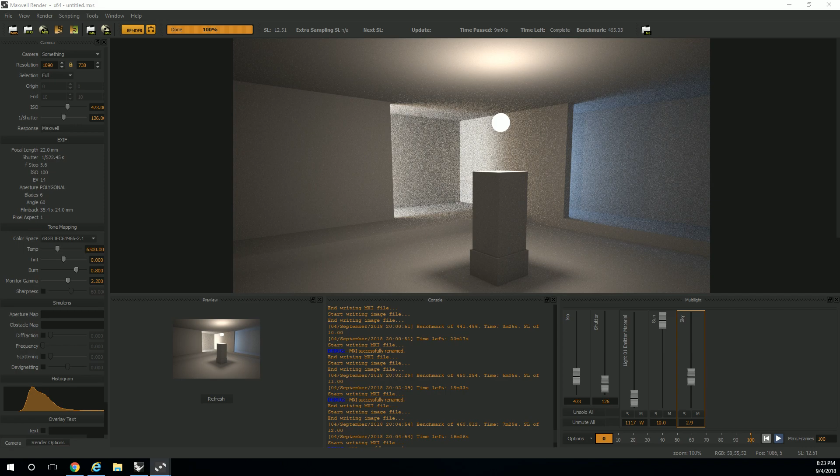It had blue light coming in from the north, and it had what is showing as white light, but it's actually more of a warm yellow light coming in from the west. But what I did was, in order to combat that graininess and to get my rendering to run faster, I simulated that light by putting point lights outside of my model. So I put a warm point light here, and a cool point light there, and ran it that way. So this is the result.

It's not perfect, not exactly like the other one, but it serves the purpose of simulating it. What I would do differently is pull this one back a little bit so it didn't spray too far into the space this way. But anyway, we'll talk a bit about that kind of stuff once you guys start getting into it. So we went from this to this.

Not too terribly different. I'd probably change the quality of the blue light too and make it a little brighter. But this one, far less grainy, only ran for 5 minutes. When you start doing 4, 5, 6 hour renders, that's a major difference between the two—the difference between a 3-hour render and a 5.5 to 6-hour render.

Okay, but anyway, so that was just a quick little trial.

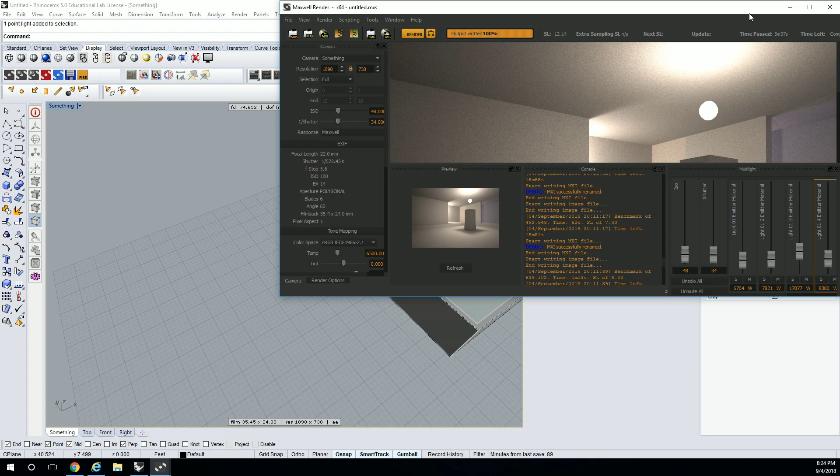So let's get into some more interior lighting. What you guys will probably need to be aware of is that we're starting to get some real-ish lighting quality in the space, but it doesn't feel real. It doesn't feel real because we have this little ball that's just hovering there.

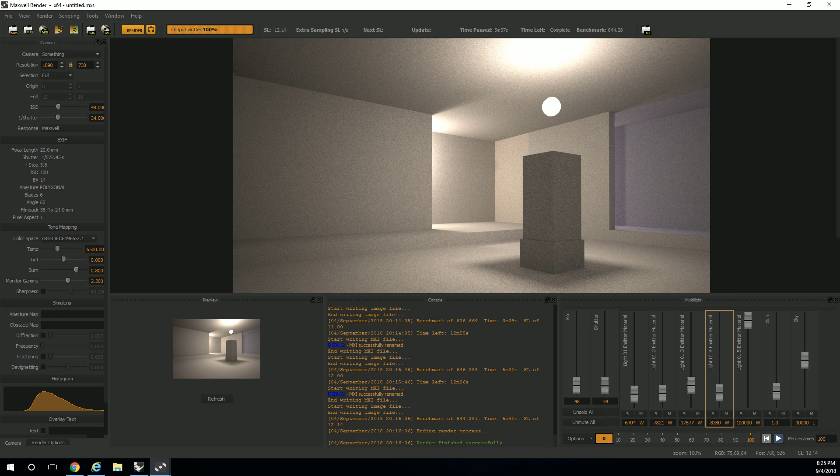So what we actually have to do is model enough detail to make what we're doing in the space feel like it pulls us into the realm of reality, and just make it feel like we're in that digital world and actually in that space in our real lives. One of the easiest things you can do is just use the smallest amount of detail possible. If you start using fine detail, you don't even have to do it too much—it's actually going to read really well.

So let's get into the model. What we're going to create are can lights. Raise your hand if you know what a can light is. Okay, so a can light is like a recessed light that you see anywhere.

Looks like these—they come in many different shapes and sizes and varieties. Some swivel, some stick out, some are further recessed. The key here is you're going to be tempted to just cut a hole in the roof and put a little disc in there and say, this is a light, go. But we need to change it so that it actually shows that little rim. And I'm telling you, that little rim on that light makes all the difference.

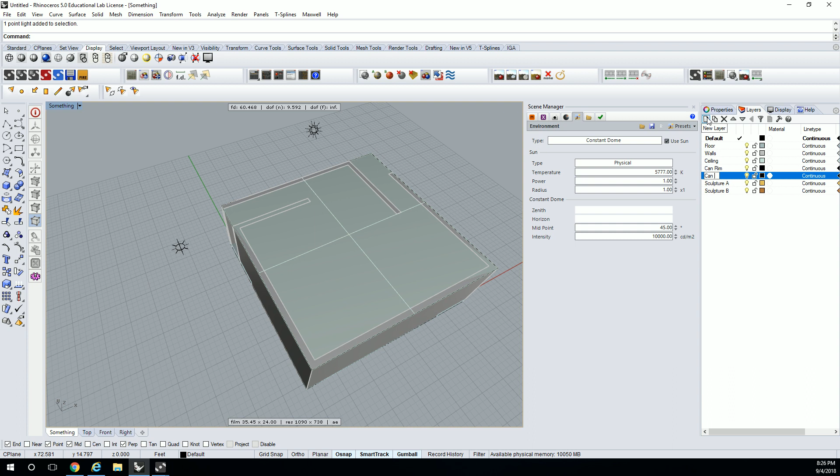So we're going to do a little trial. In your model, let's turn on a layer and call it can rim, and then we'll do can light. The can rim, I'm going to make blue. Can light, I'm going to make light gray. So the way I'm actually going to do this is just using a sphere.

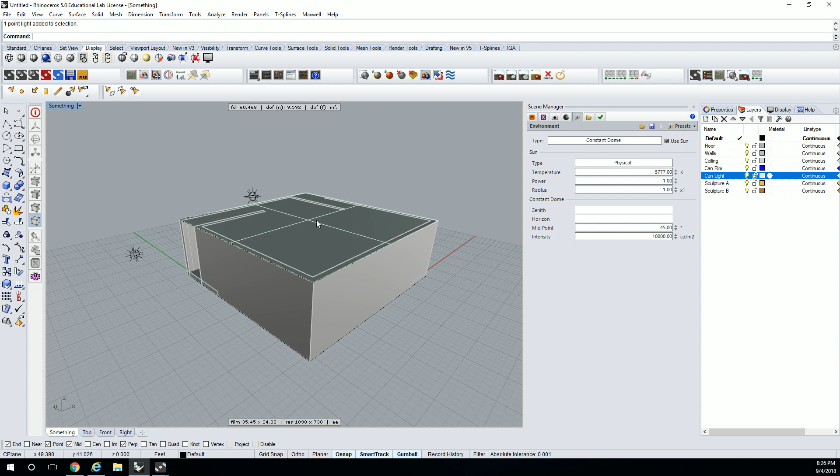So I'm going to model a little rim around it. We're going to go to can rim, let's do a sphere, start off here. This is a radius dimension, so most cans are going to be anywhere from 4 to 6 to 8 inches. I'm going to accentuate how big these are just so they're a little more obvious. So we're going to go with 8 inches, which is a 4-inch radius.

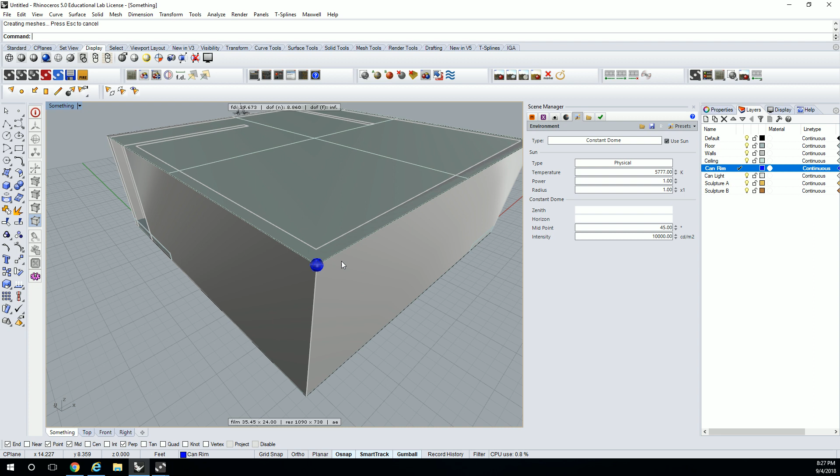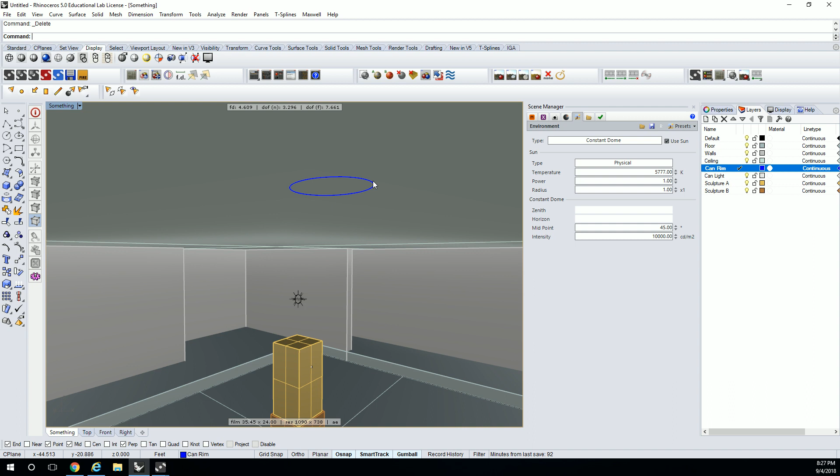Okay, when I move this thing into the space, I can use the roof to split it. So I'm going to say select objects to split, use that to split it, and get rid of this. There, okay, so that's my semicircle.

The cool thing about the semicircle is I can actually extract the wireframe just to get that edge. Side note, guys, if I ever say a tool you've never heard of and really want me to explain it, you can stop me. If you've never heard of extract wireframe, it's a really important tool you should know about.

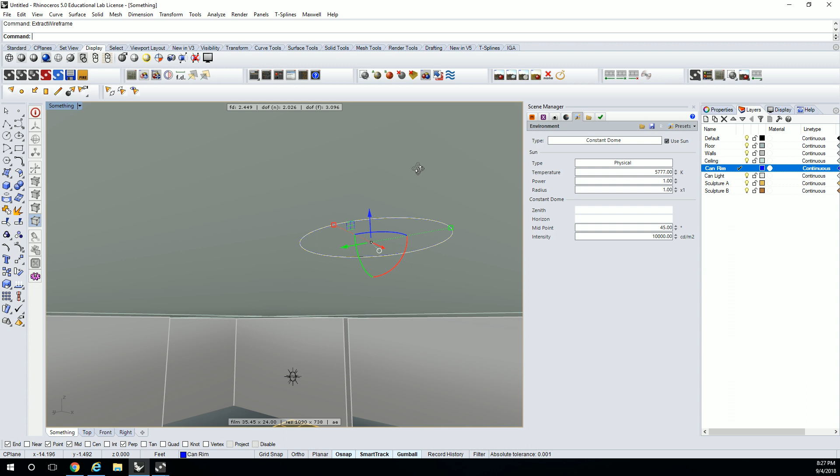Okay, so I'm going to extract that and do a couple things. I want this to be efficient for me to model, so I need to first create all the geometry and group it up together the way I need it to be and look. Secondarily, I'm going to have to create a disk that I can move around with all the model elements I place, and that's going to be used to subtract.

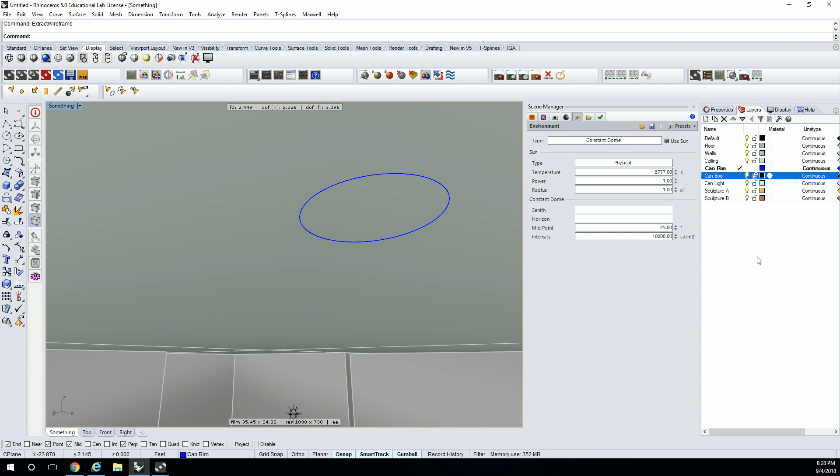So I'm also going to create another layer, and I'm going to call it can bool. That's for my, I don't know why I call it bool, I call it negative, subtraction, whatever you want to call it. I just use that for subtractive elements.

So here I'm going to say offset, let's do it half an inch. Yeah, that should do it. Something like that. And this curve, that curve, we're going to planar surface that thing.

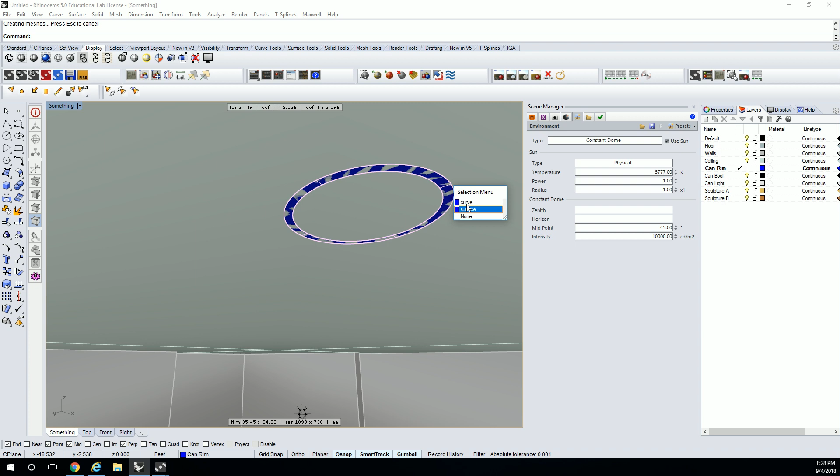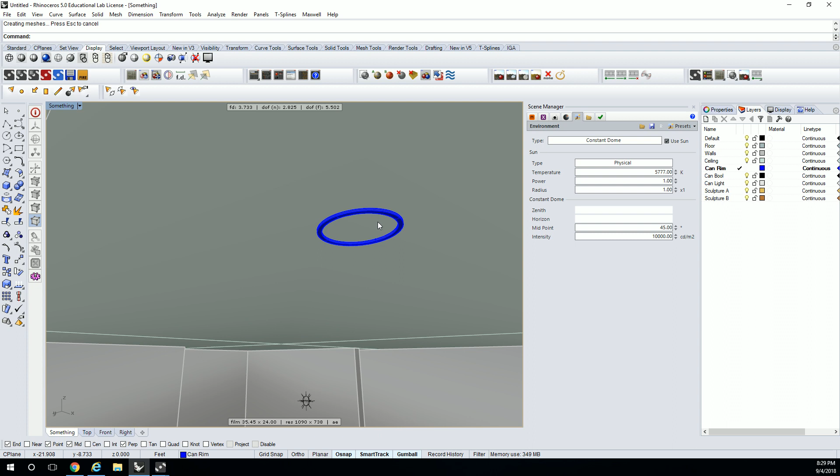Grab that surface, extrude. Oh, I went the wrong way. Let's see, extrude surface, let's go a quarter inch down. Minus a quarter inch, there we go. So that's a little exaggerated. Normally I wouldn't go a full quarter inch, I'd probably keep it like an eighth of an inch and keep it really fine. But yeah, you'll see that there.

So here I've got a curve, I'm going to do a planar surface on that one too. And this one I'm going to put on my can bool layer. I'm going to make that red so it sticks out like a sore thumb.

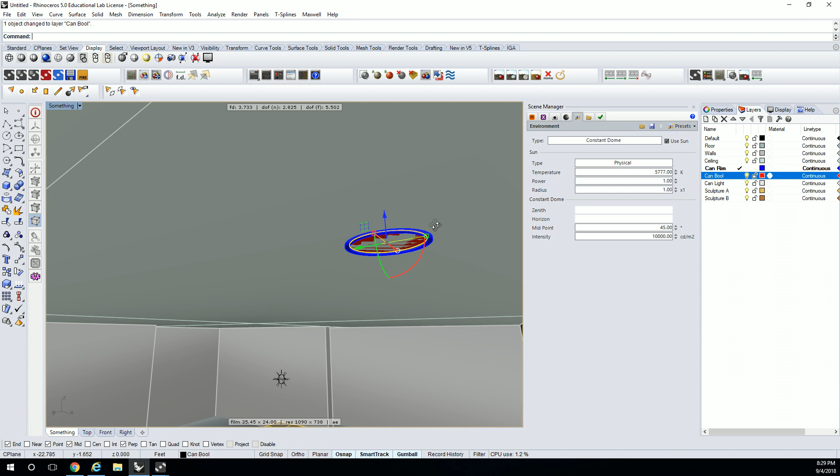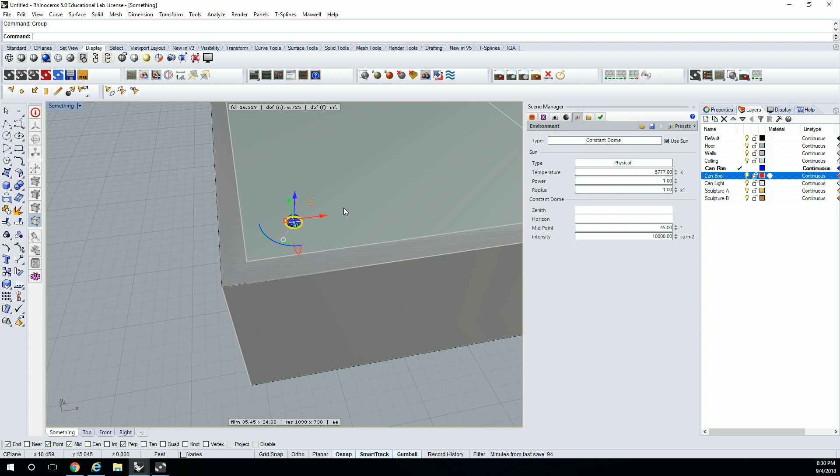Okay, so I've got a couple things here. I've got my housing, the actual can. I've got the rim. I've got the Boolean surface. Whoops. And I'm going to select that without that and just group it for now. So now when I select that, all of that gets selected.

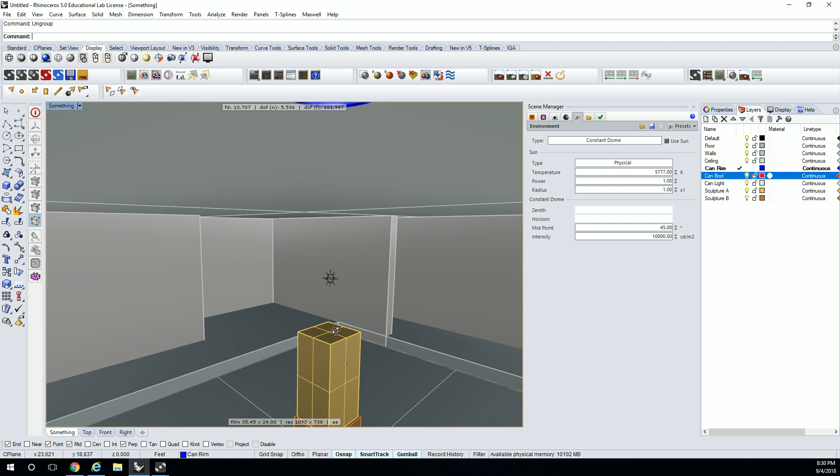Okay, so I don't really need too much lighting in this space. So I'm going to, oh, one other thing I forgot, inside of that group we also need, ungroup, we also need a light. So let's grab...

That curve again, planar surface, grab the blue one. I'm going to put it on can light. There we go, perfect.

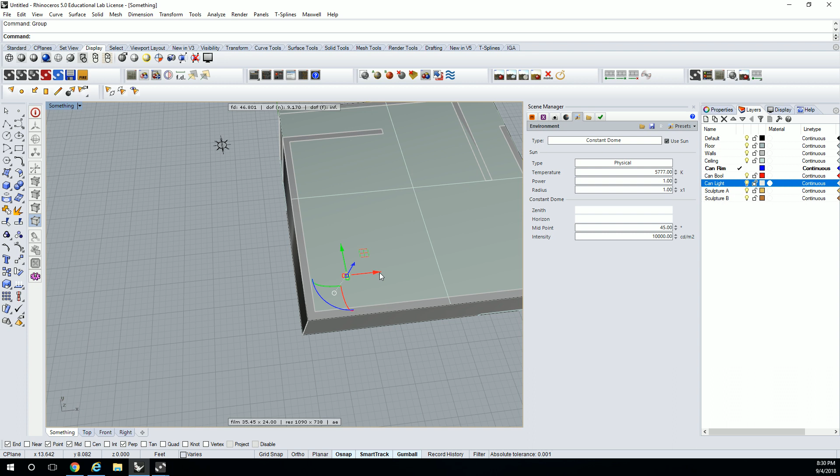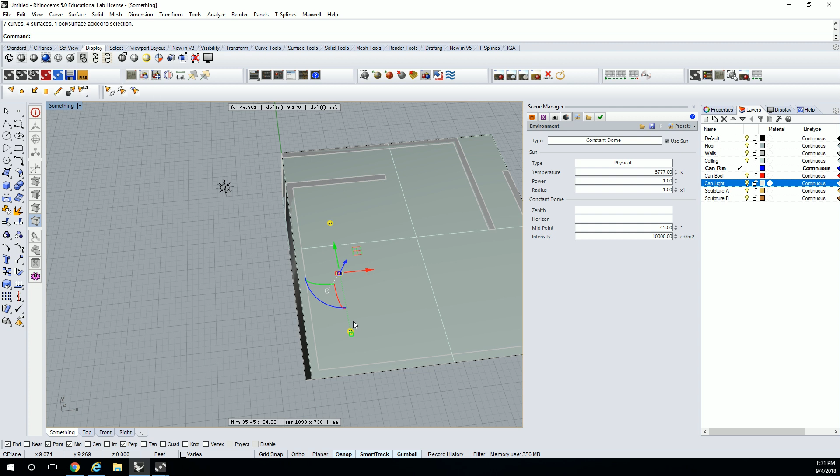Group. I'm going to just make this easy on myself and not worry about the array command. So I'm going to go 5, make it 8 feet. Actually, let's just go 10 feet. No, 8 feet. 8 feet. 8 feet and 8 feet. There we go.

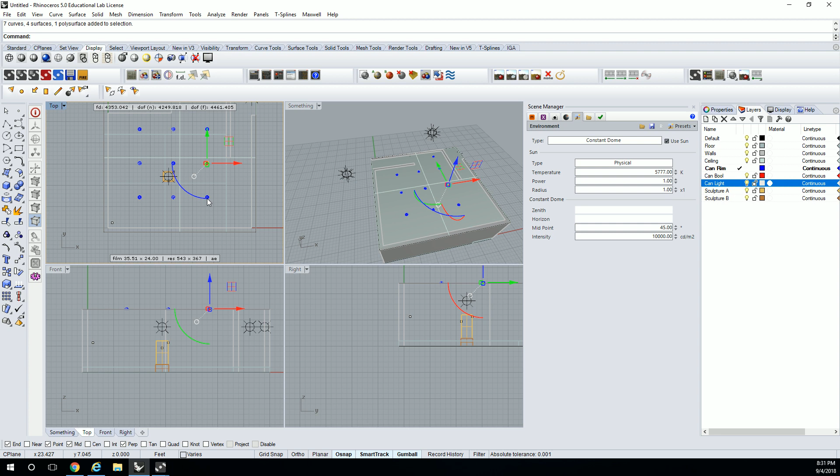Forget it, just grab them this way. So all I'm really doing here is putting them into place so that they look good in the rendering. Nothing special. And then I'm going to copy another one up here. I'll do another one over here too. Something like that, there we go.

So, you guys need to be thinking about process. I don't know how much you guys would have scrutinized how I put that assembly together, but I found that in my head to be a very efficient way to assemble all those.

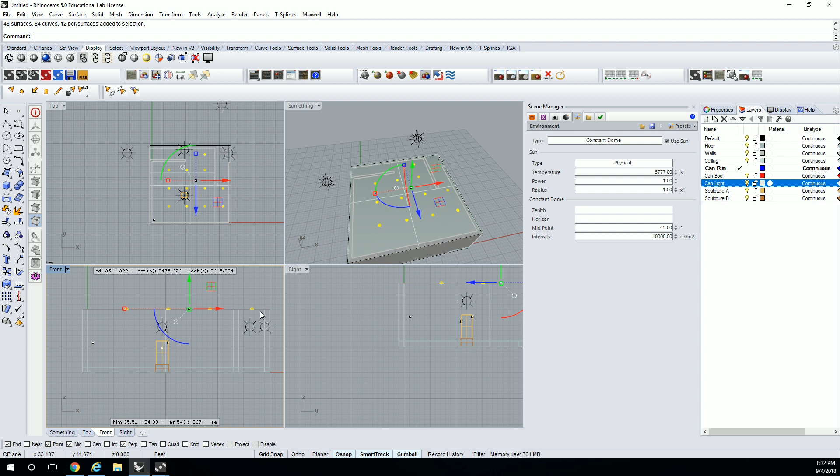So now what's cool is I can select all of them, ungroup them, turn off—let's go to the bool layer—I can turn off the light and the rim. And all I have are these subtractive guys right here. So let's see...

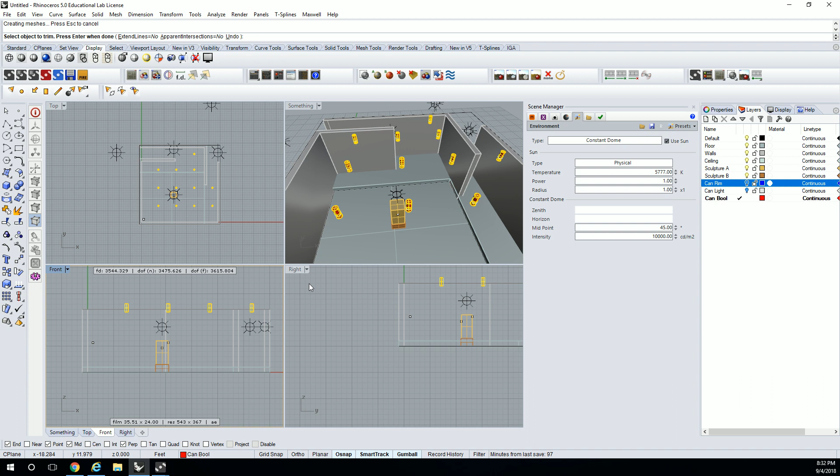It doesn't have volume, so let me just grab all of these, give them some—whoops, nope, didn't get it—give them some volume, stick them down, and I'm just going to use trim. Cutting objects, these guys, trim that surface. Whoa, I did it the other way. Oh, that's right, I can't do it that way. All right, maybe I do want some thickness here.

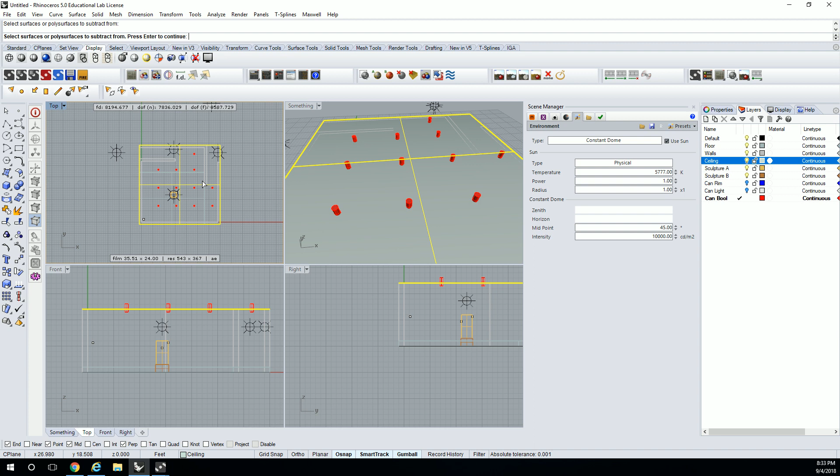So I'm going to extrude this surface 1 inch. Let's go to ceiling, now I can do that. Boolean difference, select the surface, polysurface. There we go, cool. I'll get rid of that. Boom, now I got holes.

And then when I turn my layers on, those lights are filling it up. Okay, so it doesn't seem like a lot of modeling. At least I hope that didn't feel like a lot of modeling to you guys, but I'm telling you, it will make a huge difference.

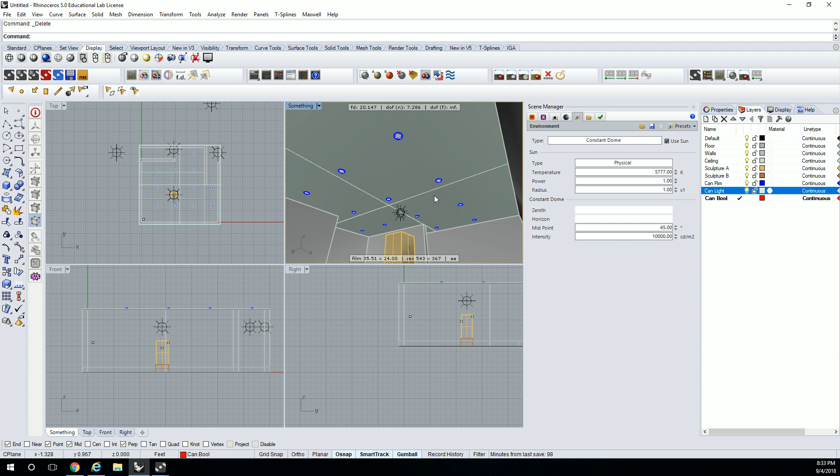All right, so I do want to kind of separate the prep video from the rendering introduction of how to use Maxwell lighting materials. Do you have any questions about what I did just there? No? Okay, I thought that would be cooler.